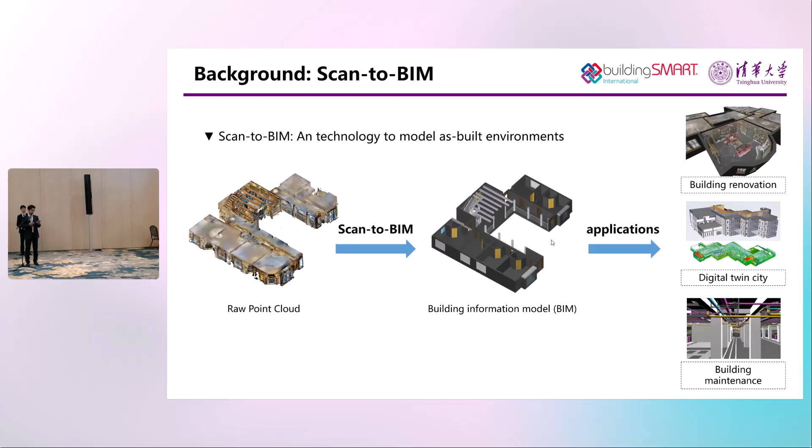Nowadays, scan-to-BIM is increasingly starting to embrace AI. But here, we still lack large-scale domain-specific datasets, multi-dimensional accurate benchmarks, and finally, we lack a standard workflow for AI-based methods. In short, AI is here, but scan-to-BIM is missing the foundation it needs.

These three issues create many obstacles for researchers in the field. For example, without a large-scale dataset, how can I train my AI-based algorithms effectively? Without a reliable benchmark, how can I evaluate whether my algorithm is good enough? And also, without a standard workflow, how can I even apply AI to my research? These unanswered questions show the urgent need for a new solution.

To answer this question, we present BIMNet with openBIM as foundation. Leveraging the open source, technically mature, and standardized features of openBIM, BIMNet aims at addressing these three challenges with three IFC-based designs. First, an IFC-based domain-specific dataset with real-world point cloud and also manually modeled IFC data.

Second, an IFC-based multi-dimensional benchmark covering both geometric and topological evaluation for scan-to-BIM. And third, an IFC-based scan-to-BIM workflow, integrating dataset, benchmark, and also multiple plug-in AI-based algorithms for scan-to-BIM. In short, BIMNet provides the missing foundation for AI-enhanced scan-to-BIM.

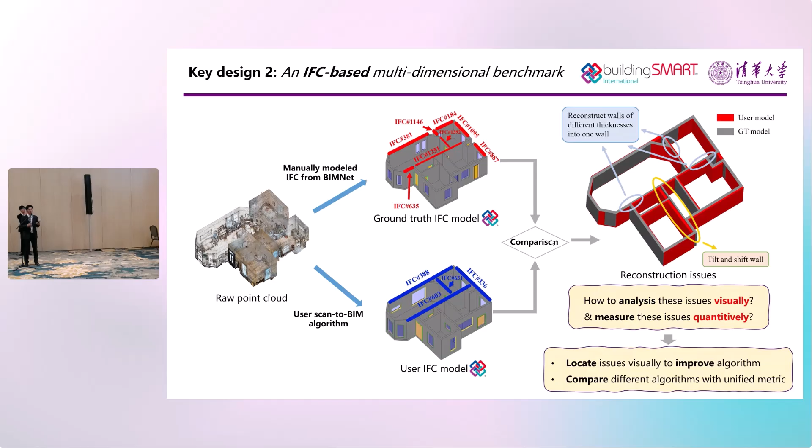Here is our design. For our benchmark, we first get the representation and placement information from IFC models. Then, we develop a geometric benchmark based on 3D intersection over union to evaluate the accuracy of reconstructed shapes.

We also develop a topological benchmark based on normalized graph edit distance, a technology to measure the difference between two graphs. This topological metric is aimed at evaluating the correctness of spatial relationships.

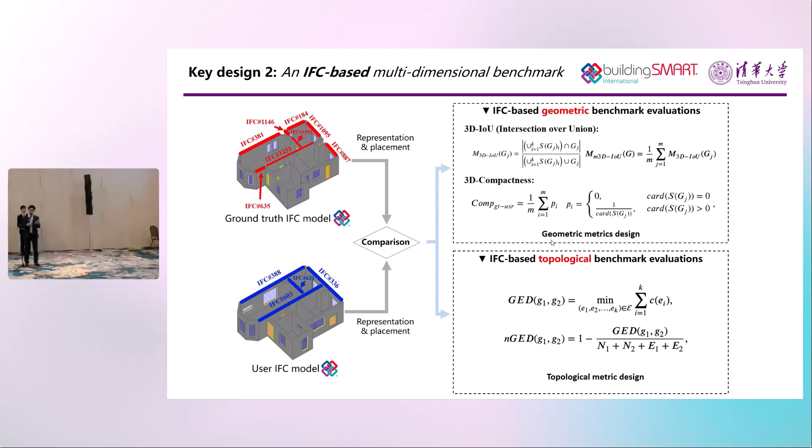These metric designs are implemented with IfcOpenShell, Python, and Open3D for measurement and visualization. Our geometric benchmark is sensitive to thickness, tilt, and shift of wall components, and our topological benchmark is able to find wrong space connectivity and wrong enclosed spaces.

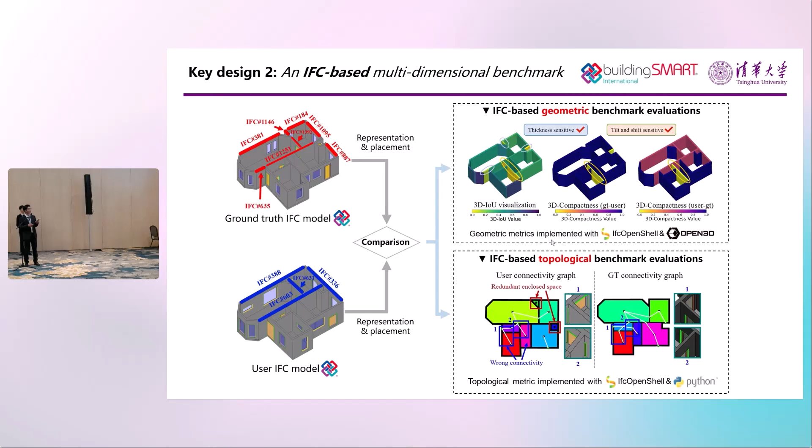Our third key design is an IFC-based scan-to-BIM workflow. First, we have our IFC-based dataset, which serves as the foundation for training plug-in AI-based algorithms. Our benchmark evaluates the performance of the algorithms.

Once the algorithm is trained and validated, it is ready to be deployed online. Our workflow finally takes real-world scans as input and outputs as-built BIMs for various applications.

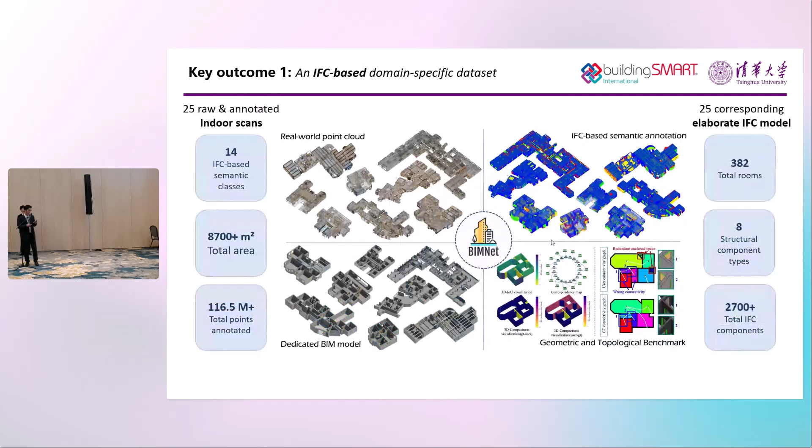Next, let's go through the 3 key outcomes corresponding to our 3 key designs. The first outcome is we publicly release BIMNet, an openBIM-based large-scale scan-to-BIM dataset, spanning more than 8,000 square meters and encompassing more than 300 rooms.

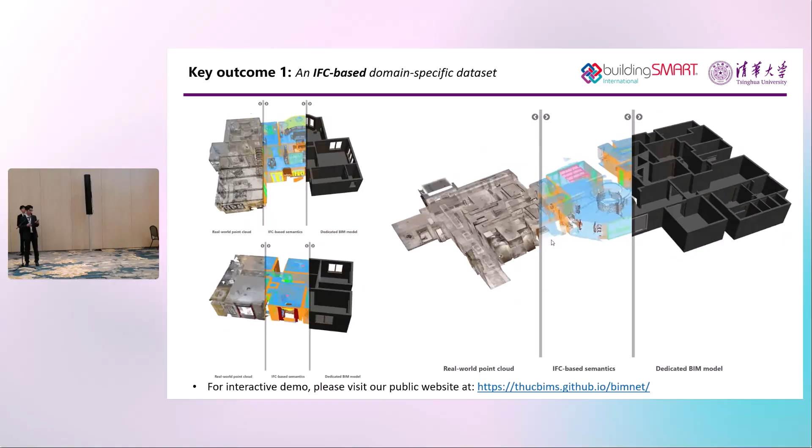Here are some interactive demos for our dataset. Each data example includes real-world point clouds, IFC-based semantic point cloud, and dedicated BIM models to support training and evaluation at all stages of AI-based scan-to-BIM.

The second outcome is we propose an IFC-based multi-dimensional benchmark. Through real-world and scale-up stress testing, it is proved that our geometric benchmark significantly increased the issue detection rate and evaluation efficiency. The proposed topological metric also fills the gap of the underexplored scan-to-BIM topological metric with IFC-based design.

Our third outcome is an IFC-based scan-to-BIM workflow. Today, many of our colleagues talk about combining AI and AEC through large language models. However, in our research, we want to offer a different perspective, connecting advances in computer vision with AEC, especially highlighting the importance of AI-based point cloud semantic segmentation in scan-to-BIM.

At the stage of semantic segmentation, we're able to train and validate up-to-date AI-based algorithms with BIMNet. While at the stage of component reconstruction, we can also analyze and evaluate scan-to-BIM algorithms with the BIMNet workflow.

We want to emphasize why openBIM is the key foundation of BIMNet. openBIM provides us with mature and widely adopted BIM standards, which are suitable for AI training. The open nature of openBIM has made it easy for us to access geometric and semantic data of IFC.

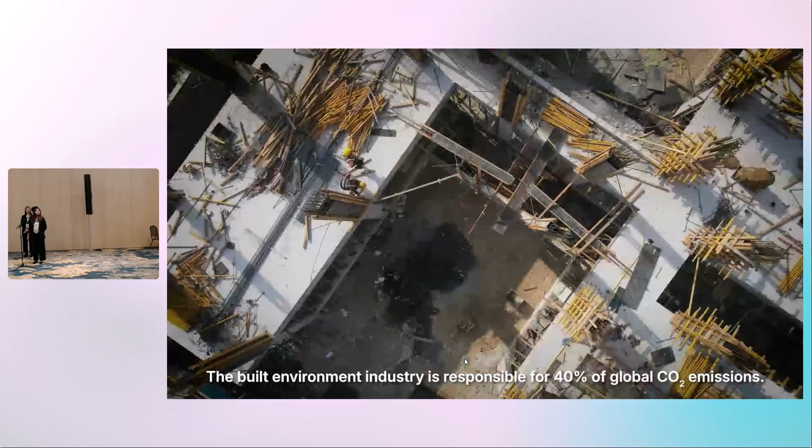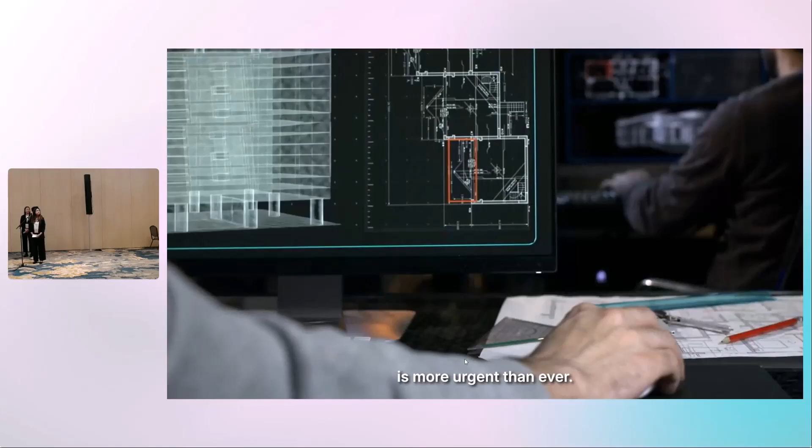Unlike operational carbon, embodied carbon is locked in once construction begins. That's why managing embodied carbon at the design stage is more urgent than ever. But today, carbon checks are manual, tedious, and slow. And that's why sustainability is often an afterthought, until now.

I'm CarbonSmart, the smart way to reduce embodied carbon quickly, accurately, and sustainably. Let me show you how I work.

Let's create your first project. Upload your IFC file. I'll scan and identify all elements.

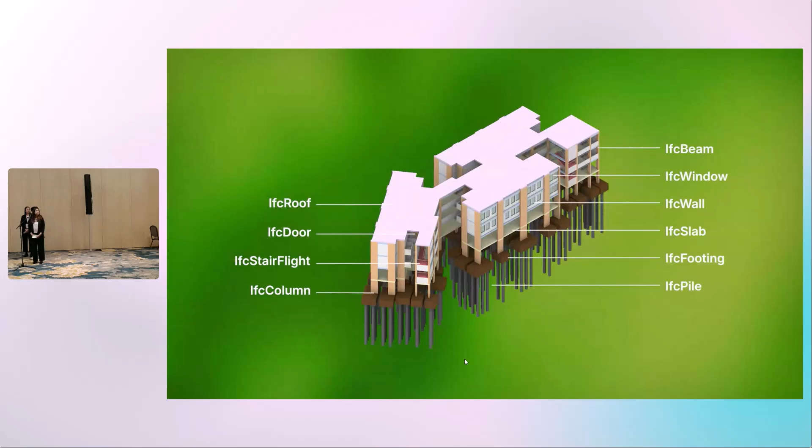I'll check your materials against my database. Don't worry, I'll catch any mistakes. Fix what you can, I'll take care of anything left behind.

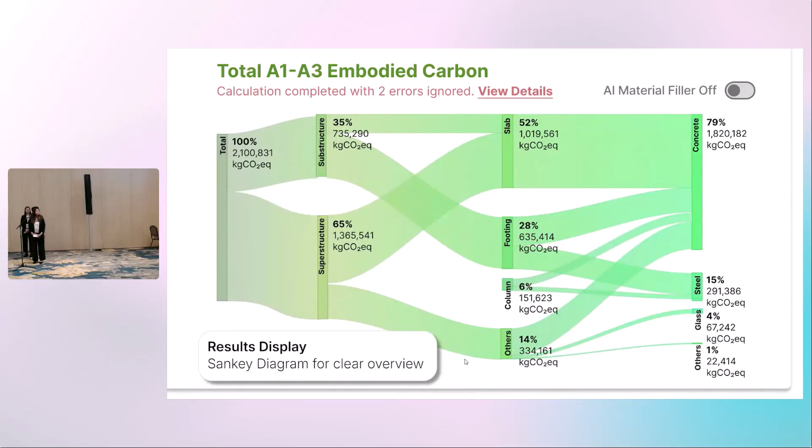All set? Sit tight, I'm calculating the values. That's it, here are your results. Not sure about everything? I've got it covered.

Got a new iteration? Drop it in. Let's see what's changed. All done? I've got your results ready for export. Perfect for your documentation or reports.

Our vision for CarbonSmart is making embodied carbon visible, early, and easily actionable through open data standards, thereby empowering the AEC industry for smarter decision-making as well as a sustainable future.

So how did we come about with our project in the first place? We found that embodied carbon is often overlooked and not considered early. With the overall 40% contribution by the AEC industry towards global carbon emissions, it is important for us to reduce carbon emissions to save our environment as well as its downstream impacts. Traditionally, operational carbon has been at the forefront of industry efforts.

However, we believe that there needs to be a shift to focus on embodied carbon, as embodied carbon is set in stone and there's a shorter time frame for embodied carbon to be tackled.

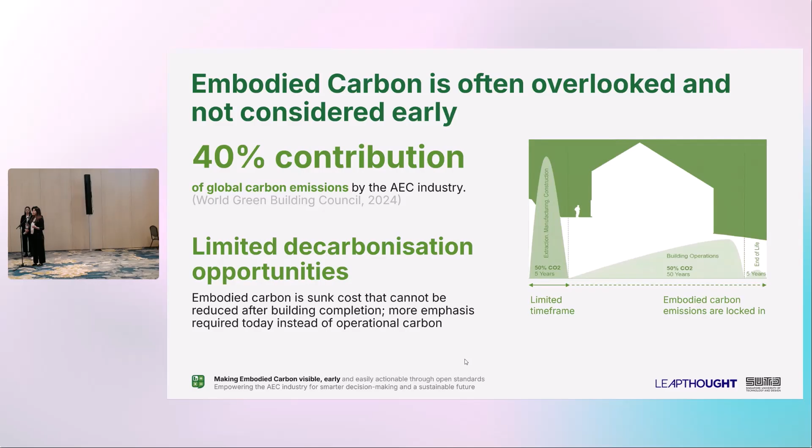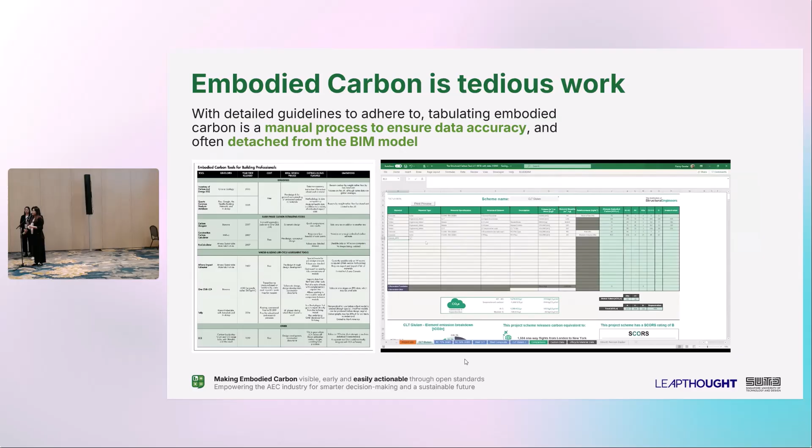From our interviews and surveys with different companies in the AEC industry in Singapore, we found that the embodied carbon documentation process is currently a very manual and tedious one. This means that a lot of manual data processing is needed from the different stakeholders in order to arrive at the final embodied carbon calculation, which often takes up 2 weeks.

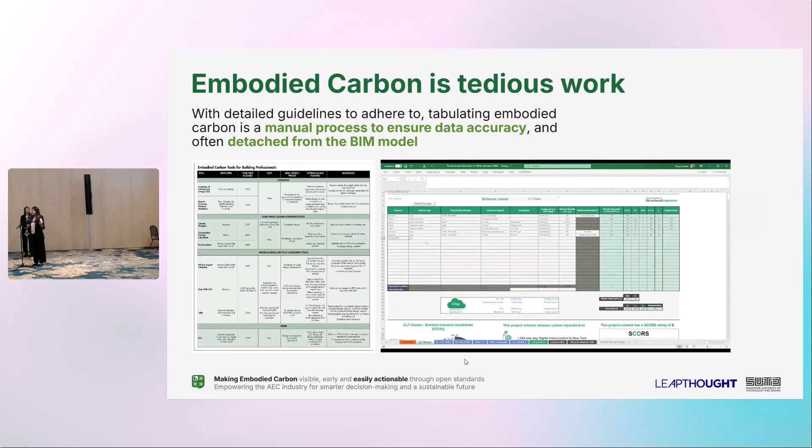This brings us to our problem statement. How can we streamline processes between the AEC stakeholders during the pre-construction design phase to effectively reduce embodied carbon of buildings?

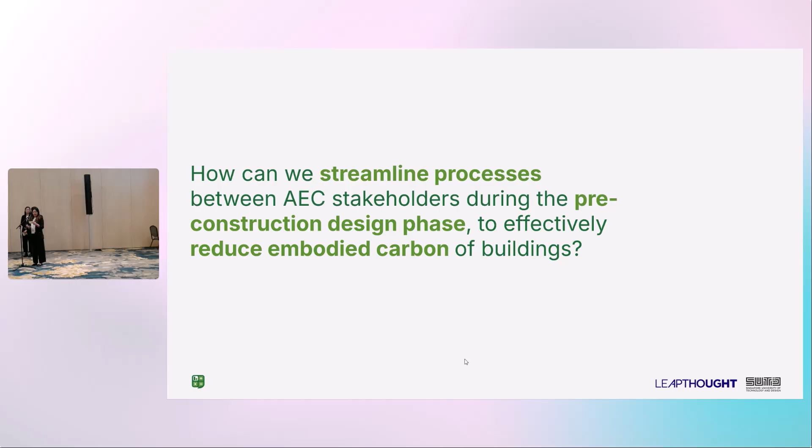A bit more context about our project is that we're based in Singapore, which is one of the first few countries to have mandatory BIM submissions along with openBIM data standards. And that helps our project align with the national standards and goals, such as using openBIM during integrated planning and design, as well as looking towards a sustainable urban system towards decarbonization efforts.

Using this baseline of Singapore, we envision that CarbonSmart can be sort of a pilot testing in Singapore before scaling up globally, as well as since Singapore has already used openBIM in their national compliance checks, embodied carbon can be part of that natural workflow as well. We also envision that CarbonSmart can help set a global blueprint to do decarbonization through openBIM.

And all of this was kept in mind to prospectively integrate into LeapThought's platform of Fulcrum HQ with the launch of CORENET X, which is Singapore's mandatory openBIM regulatory submission platform.

So from our design process, we understood that multiple AEC stakeholders use different authoring tools and different file formats. And when embodied carbon calculations are involved, this often takes a lot of processing because of the different file formats and data requirements needed. And after long weeks of processing this data, it ends up in a very technically detailed report for documentation, but it's often detached from the BIM model as a lot of processing needs to be done.

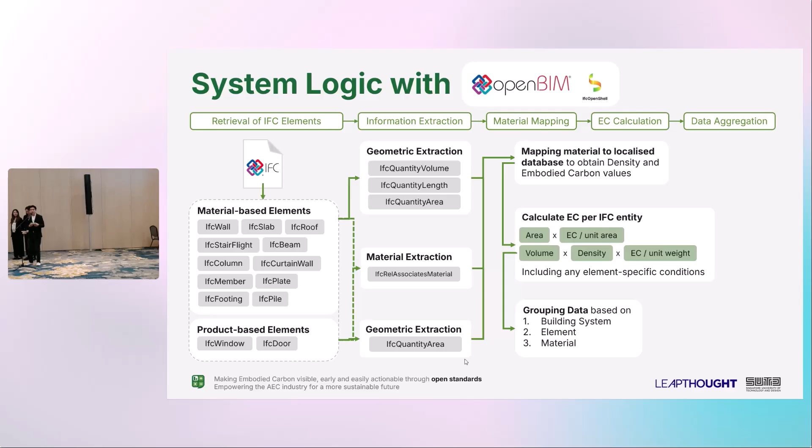openBIM as well as IFC has also allowed for consistent material schema traversal and classification into specific IFC entities, making the workflow to calculate embodied carbon very easy as well as consistent. Our core product produces and manages to calculate trusted embodied carbon output with error handling.

But the AI component that we have makes it smarter. Using a sentence transformer model, if your model has undefined or mistyped materials, it will learn from past information to select the best fit for the material. Despite our system working well without AI, this AI material filler will result in fewer defaults, less rework, as well as more accurate EC calculations.

And with that, we see CarbonSmart being sustainable for both business and environments. One key impact of CarbonSmart will be to increase opportunities for reduced carbon intervention at early stages of design. This eventually saves manpower costs for design changes along the way.

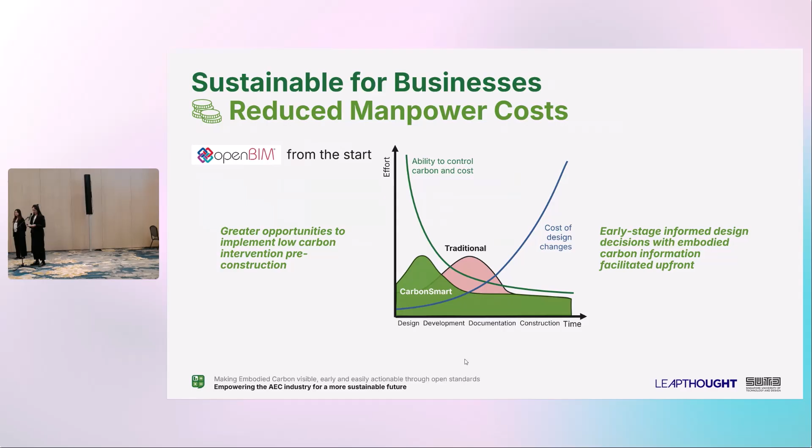Additionally, we help keep the history of file uploads, assisting users in design iterations and mitigating potential errors in every process. This results in a lower risk of communication breakdown with greater transparency.

More importantly, we help reduce the time taken from two weeks worth of work to five minutes, giving you quick and fast, accurate calculations with visual feedback and dynamic results.

In the long run, what CarbonSmart aims to do is enable a greater understanding of embodied carbon with design decisions made in the AEC industry. We help benchmark against green standards and compliances, giving quick and accurate visual changes with material substitutions, eventually revolutionizing design decisions to be more sustainable.

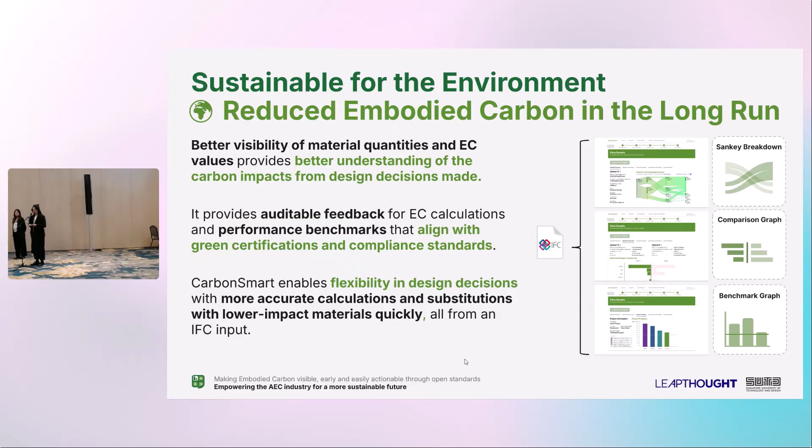Thus, CarbonSmart's mission, to reiterate, is to make embodied carbon visible, early, and actionable through open standards, as well as to empower the AEC industry for smart and sustainable decision-making in the future.

Once again, CarbonSmart would not have been possible without the foundation that LeapThought has laid out for us.

To give some context on this foundation, CarbonSmart was developed not as a standalone tool, but as part of a much larger vision for Singapore's digital built environment. This vision is powered by LeapThought's platform, Fulcrum HQ, which forms the backbone of Singapore's next-generation regulatory system under CORENET X.

Fulcrum HQ is a cutting-edge cloud-first platform transforming how enterprise knowledge, productivity, and regulatory data are managed. It underpins the CORENET X collaboration platform, central to Singapore's Industry Transformation Map. By shifting regulatory submissions from isolated documents to coordinated model-based submissions, CORENET X leverages openBIM for seamless collaboration across disciplines and agencies.

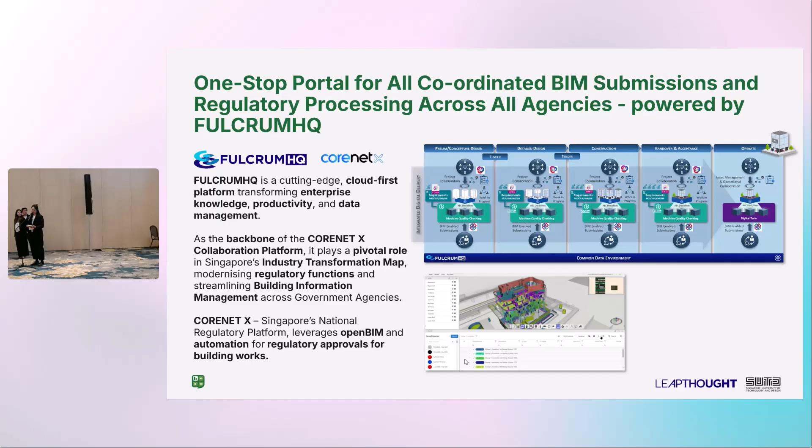This is how CarbonSmart can eventually plug in as part of a sustainability compliance check, meaning an embodied carbon national submission framework. A key feature of Fulcrum HQ is its automated model checker, which aligns with Singapore's vision of regulatory efficiency through openBIM and automation.

Just as Fulcrum HQ applies advanced algorithms to validate design rules, CarbonSmart applies its own calculation rules to assess embodied carbon within IFC models. Both share the same foundation, using openBIM to ensure accuracy, repeatability, and industry-wide applicability.

These are just examples of the type of automated regulatory checks already being handled through Fulcrum HQ. The value here is that once data is embedded into the BIM model, it can be checked automatically, consistently, and transparently. And this is exactly the philosophy that CarbonSmart builds upon.

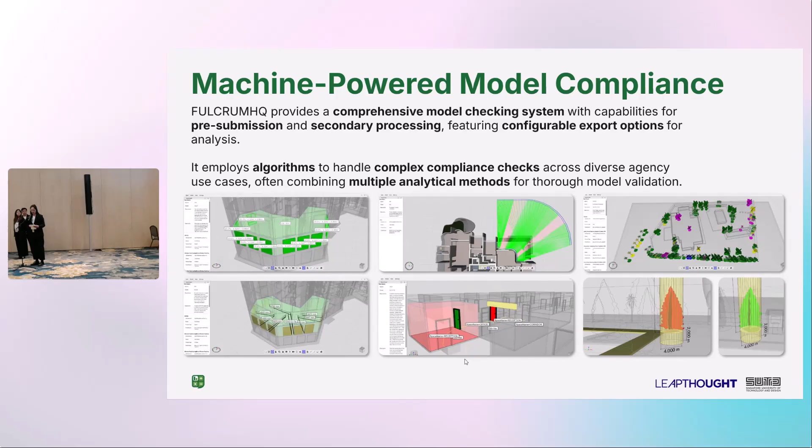When embodied carbon is embedded into the same openBIM model, it can also be automatically checked, benchmarked, and improved. In this way, CarbonSmart is not just an academic prototype, but a potential extension of the same ecosystem that is already transforming how Singapore builds.

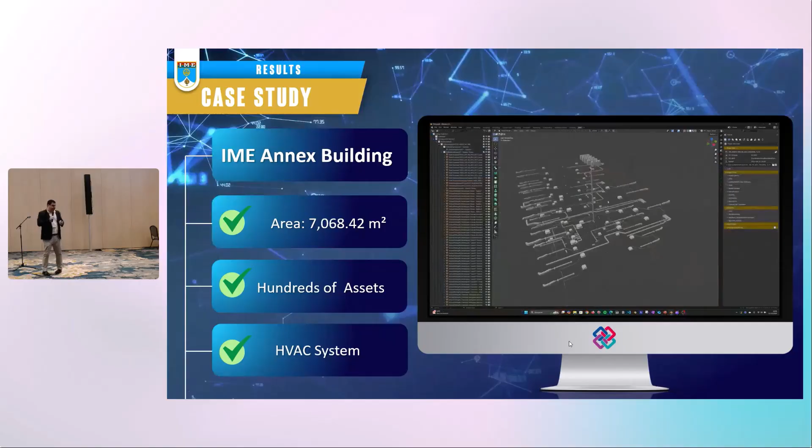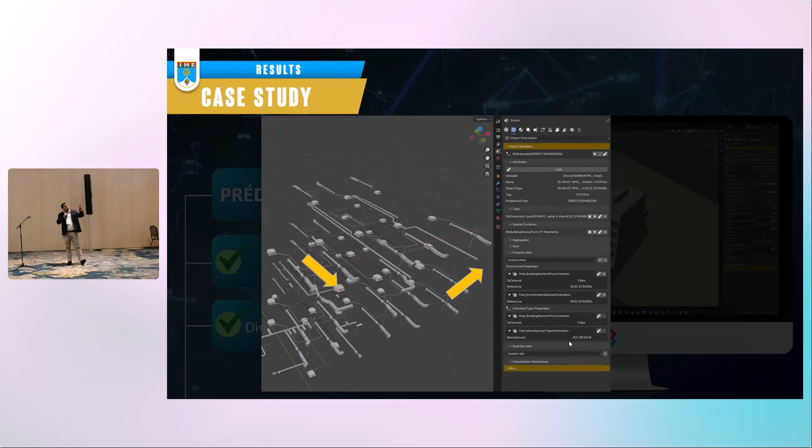In our case study, I used a student dormitory, the IME Annex building, which has hundreds of assets, but we will focus on an HVAC system, more specifically on the air conditioner system that we are seeing. When we start to analyze the model in this side menu, we can see that we don't have the necessary information to start the operational phase. So we started the process.

Here we are informing the IFC class, the destination URL, and the user token. After that, we select the option Bulk Create. After that, all the registers of this specific class were created in the web platform, as it was in the IFC file. So here we don't have the necessary information because it's just a copy of the IFC file.

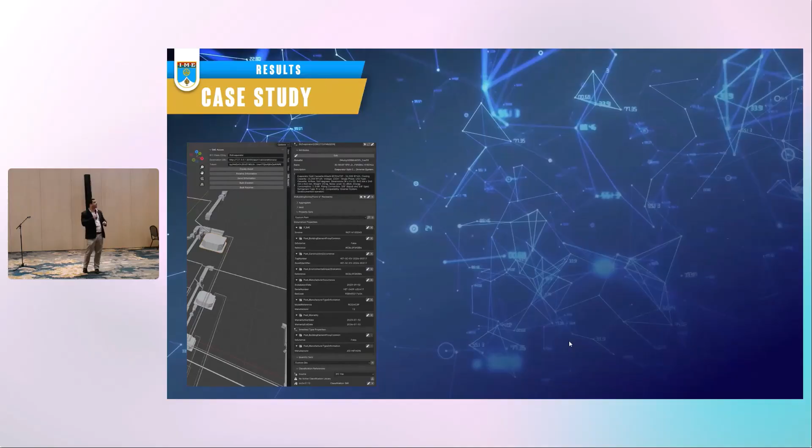So we start editing the information during the building process. And once all this process is over, we can transfer this information back to the IFC model. So now we have the same information that we had in the web platform, and now our IFC file is an information compendium as ISO 19650 stands.

Here there's a video showing everything worked together. So we are starting by informing the IFC class that we will work with.

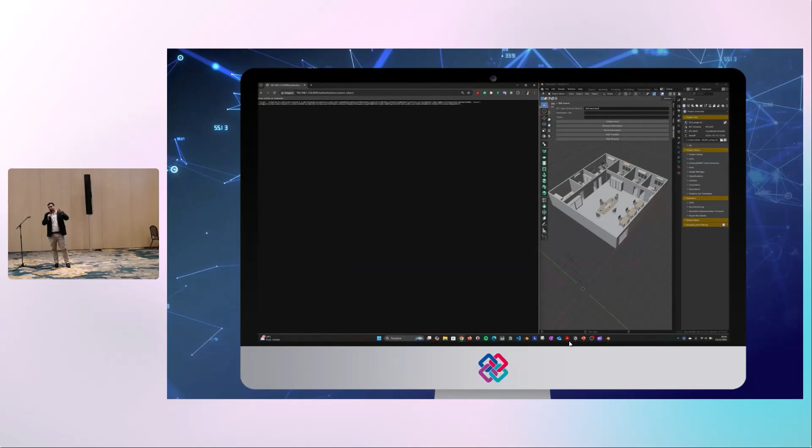And after that, we will use the web platform to generate our user personal token. So the user will have to inform username and password, and it will generate their personal token. And here we use this token to insert in the add-on to start to perform the operations.

So here I'm pasting the token, and after that I will inform the URL address. Now we are ready to start using the add-on.

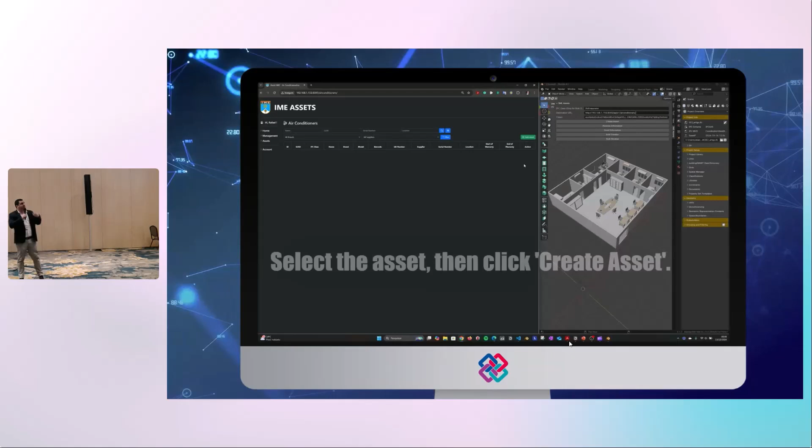So let's create our first asset. I just need to select an asset or object in my model and click on Create Asset, and the information will be registered in the web platform.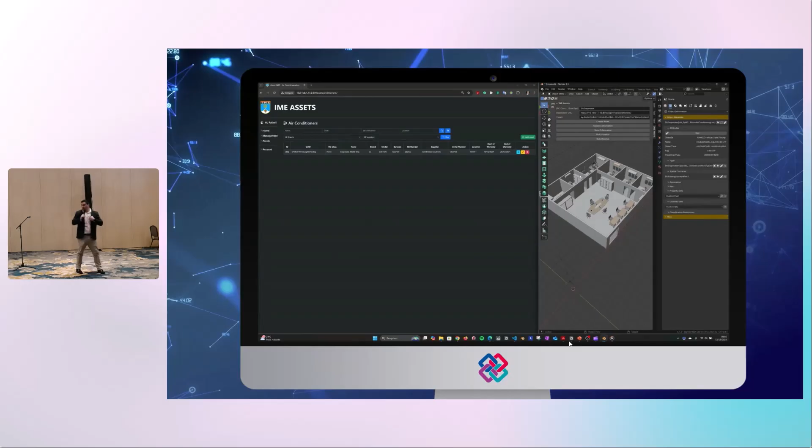Now in this situation, the information is ready, verified, and audited in the web platform, and I want to transfer it back to my IFC file. So here we can see the information is done.

So I will select the object and click on Receive Information, and I will send it to my model. We can see in the side menu, I don't have the information. When I refresh, now I have the information in the correct IFC class.

I can do the same in the opposite direction. Now I want to update the information directly on Blender. So I will change the information from 10,000 BTUs to 50,000 BTUs. I edit it in Blender, and after that, send information, and I will update my database.

And for the last one, the bulk creation operation. I just need to inform my IFC class and click Create Asset, and with it, all the information will be registered in the web platform with just one click.

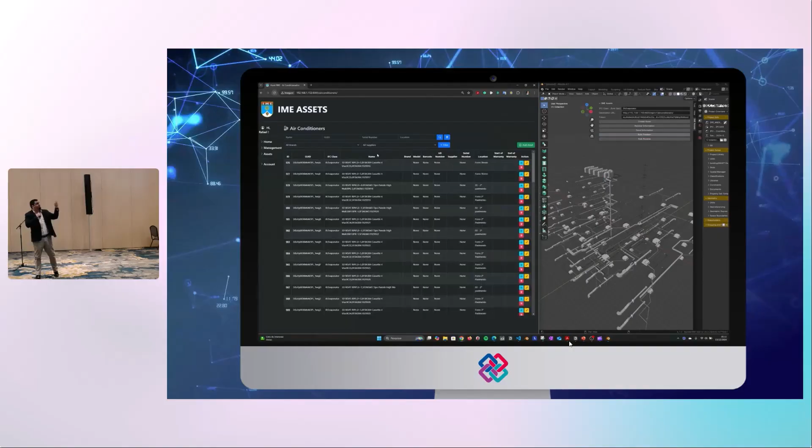As conclusion, component number 1 was able to provide an initial guide to help owners draft their asset information requirements. The web platform was able to organize and centralize information in a friendly environment for auditing. The API ensured a bidirectional flow of information between the database and the add-on. And the add-on correctly allocates the information in the IFC schema, using the BIM model as a centralized data repository.

And lastly, the entire workflow relied exclusively on open tools and open BIM solutions to prepare the model for the operational phase.

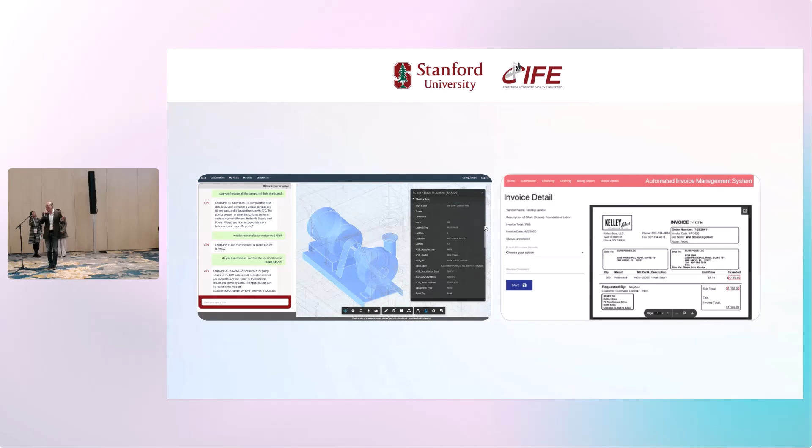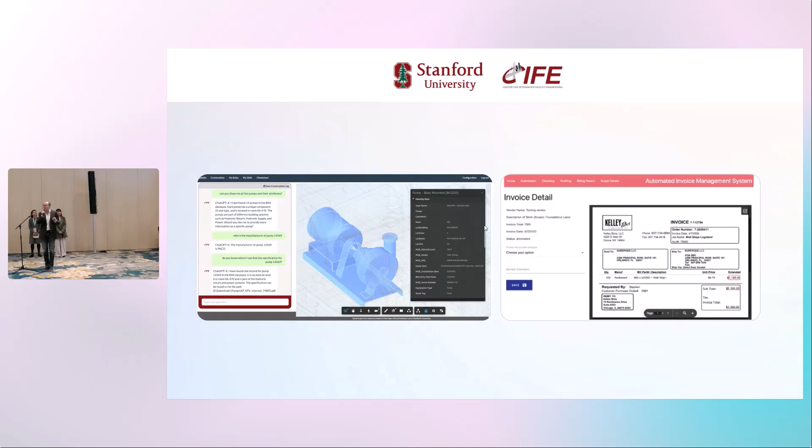And so in professional research, we also need to build on the best out there. We work with some of the tallest buildings in the world. We work with some of the best research. I'm serving as an adjunct professor at Stanford University, 25 years there now. Some of our PhD research work has been looking into native BIM with AI, has been looking into vision language model or computer vision with traditional invoices. Now the opportunity is that how can we bring those body of work research into openBIM?

So on the left-hand side, if we look into early stage, want to understand embodied carbon, our focus is how we can use retrieval augmented generation to let it be tuned, fed with local standards, local building code, local purchase order, delivery order. And of course, as you know, there's so many different forms of AI out there. So a research and development team looks at what are the performance metrics, how do we go with which AI? Even different versions of the same AI can give you very different results.

And then later stage, in terms of operational carbon, we still work globally with utility bills that may be on paper, that may be in different forms. How can we use AI to be a friend and turn those semi-digital information into the openBIM workflow? And similarly, how does a vision language model within AI get augmented to make it work?

So in the first use case about reducing embodied carbon, our team has been working on IFC research, in my case, since 25 years ago. We've been looking into BSDD IDS research for 5 years, working with version 0.6 of IDS at that time at city scale. So we build on those bodies of knowledge in this research. But the key focus, as I mentioned, is how we can feed the AI with local practice. American standard, Singaporean standards, they should be different in those different adaptations, and that's what the retrieval augmented generation is about.

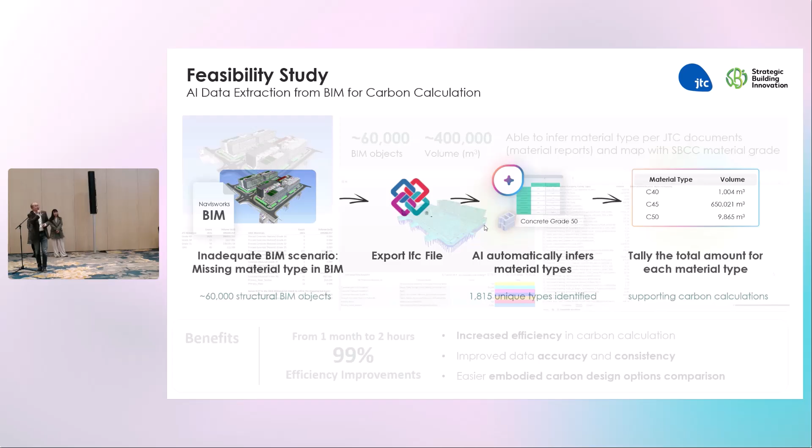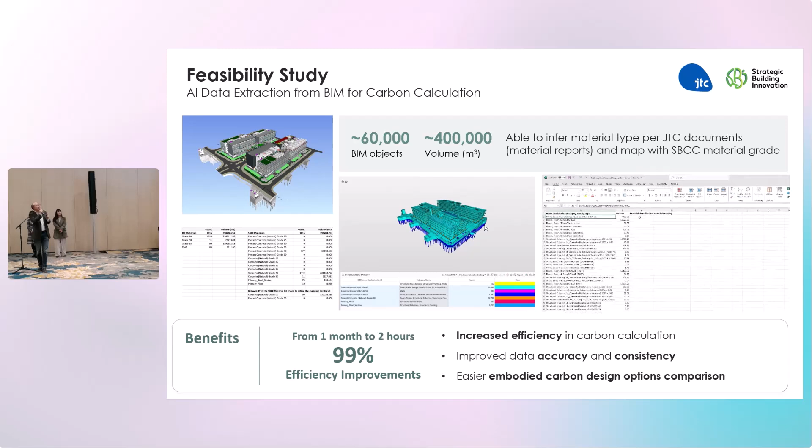And so validation, it's important that it's valid with examples out there. Working with the Singapore government, JTC, they gave us 4 BIMs, and we were able to bring it to the openBIM format. Our AI with the retrieval augmented generation was able to infer 1,815 material types that map to the Singapore Green Building calculation. Again, that's different from how you may do it in Europe and in the US. In the end, our openBIM visualization can visualize based on embodied carbon. The original BIM has missing, has error, has no information about those. It's also about how the government agency was able to tell us that it took them almost a month to complete that. Now we can reduce it down to hours. Even on the first try. Imagine we can do it 5 times, 10 times later on.

But at the same time, the variance to the traditional approach—and by the way, how good is the traditional approach, anybody's guess—but we are within 94% of their traditional carbon calculation.

Now let's move the validation to one of the tallest buildings in the world, this skyscraper project we have been working with. It has openBIM, but once again there was no carbon calculation in mind, let alone finding the engineers and sustainability managers from 20 years ago.

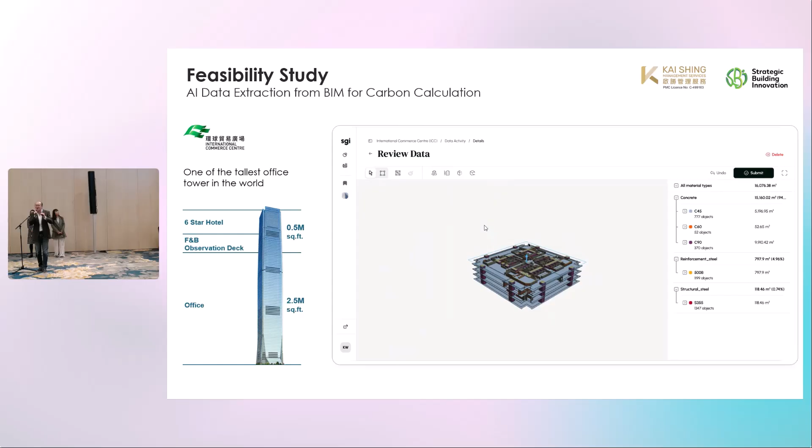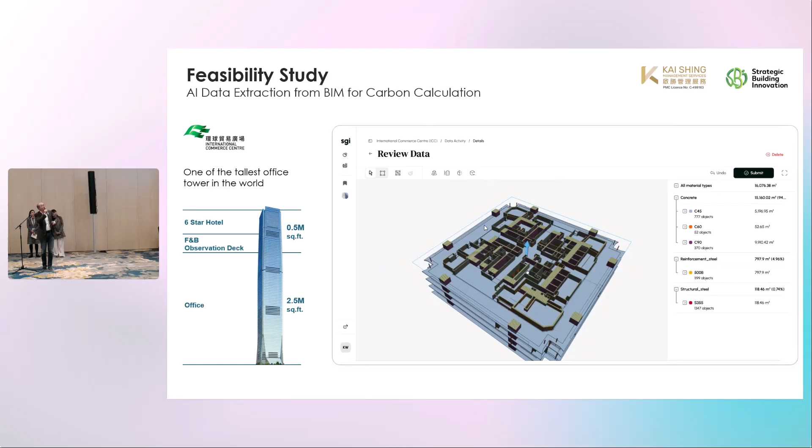So we were able to then change the RAG with the local practice and local standard from Hong Kong and let the recommendation and the inference take place. The response is that you can see on an openBIM platform how we can read some of this information based on embodied carbon. And then we also want to move beyond embodied carbon to look into the operational stage.

So Kayla, tell us more about that. Thank you, Calvin. So beyond the embodied carbon calculation, we also tackle the operational carbon. We use visual language models to read the utility bills, and then we use openBIM to visualize the data so that the performance insights will be more clear and actionable.

This is our workflow. First, the user uploads an IFC file with the space objects. Our team is also exploring using bSDD and IDS to validate the data so that the results will be more ready for analysis in the future.

Second, the user uploads utility bills, and our augmented visual language model will be able to extract data like energy consumption, billing period, and cost from different types of utility bills, even from images. We also implemented pre- and post-processing to ensure the outcome would be more consistent and accurate.

Eventually we map the results onto the IFC space so that we know and calculate the energy use intensity, and the team can easily identify the areas where we can cut down carbon emission and energy usage.

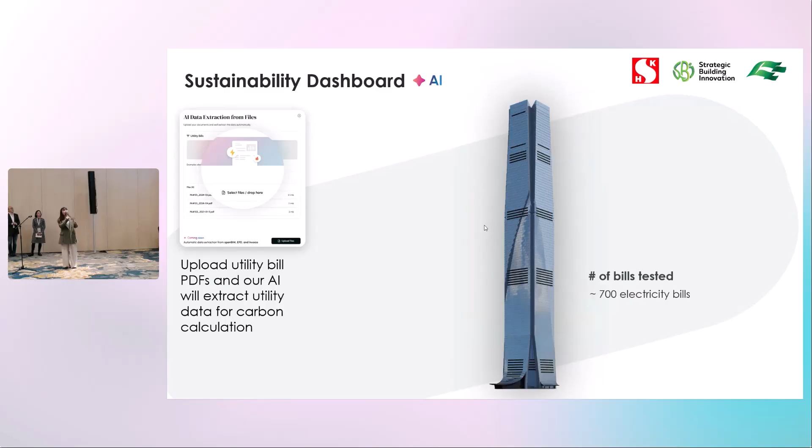We also implemented the workflow in the building just mentioned by Calvin, ICC, and there are around 700 energy bills uploaded to this platform. Among all, the average processing time is about 20 seconds per bill.

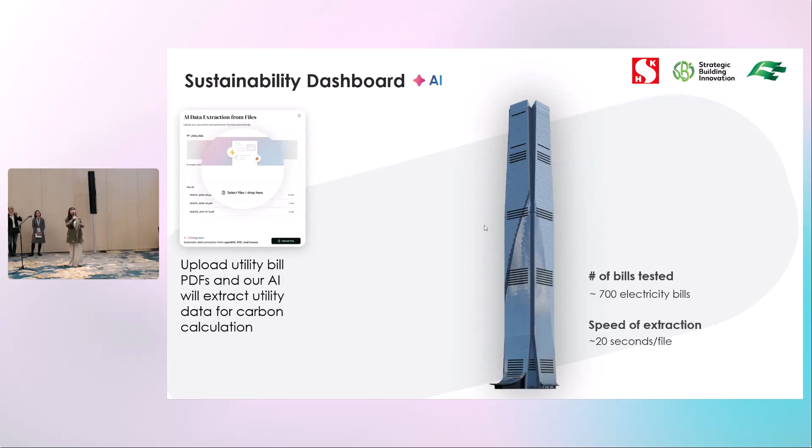There's a 94% time reduction compared with the traditional workflow. More than that, now the team can easily see an all-in-one integrated dashboard of their performance from energy and water, etc. Let's see Mr. Jeff Ng, the Senior Manager of ICC Property Management Team, about the outcome.

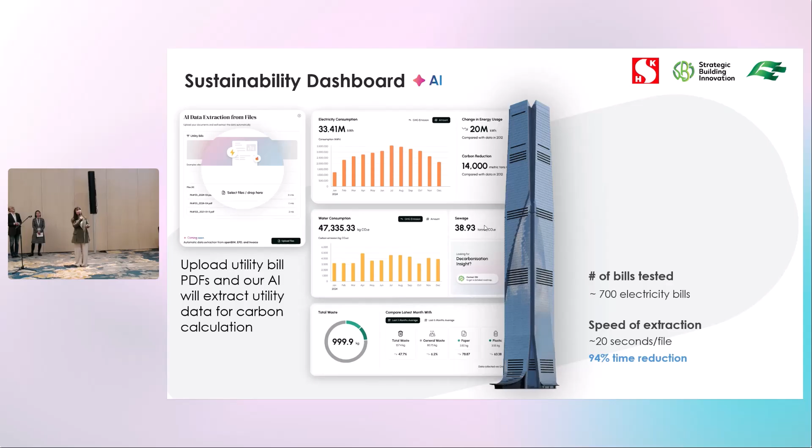Uses this AI platform to extract data from 700 utility bills, cutting process time by 94%, and analyzing greenhouse gas with multiple factors, helping us achieve our sustainability goals.

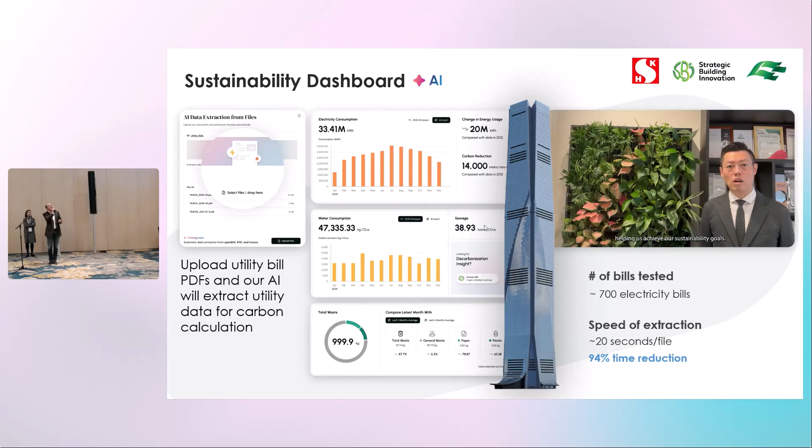So yes, really getting third-party validation on an actual live project is an important part of our validation. In this case, we have worked with 300 IFC files. We have worked on the operational stage. They have a CDE following ISO 19650 with information management.

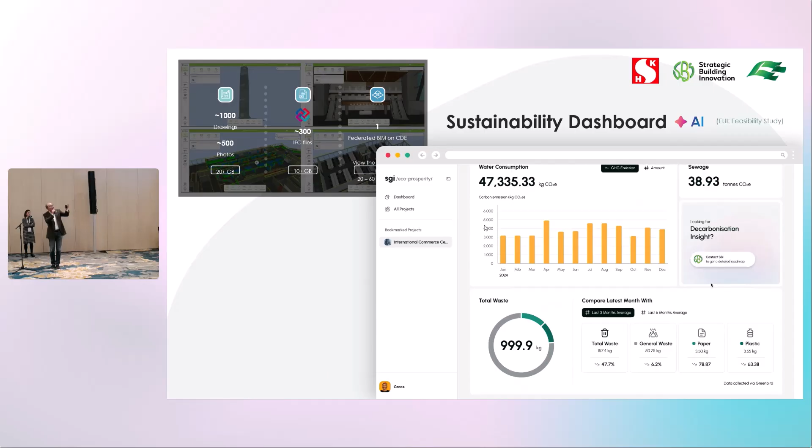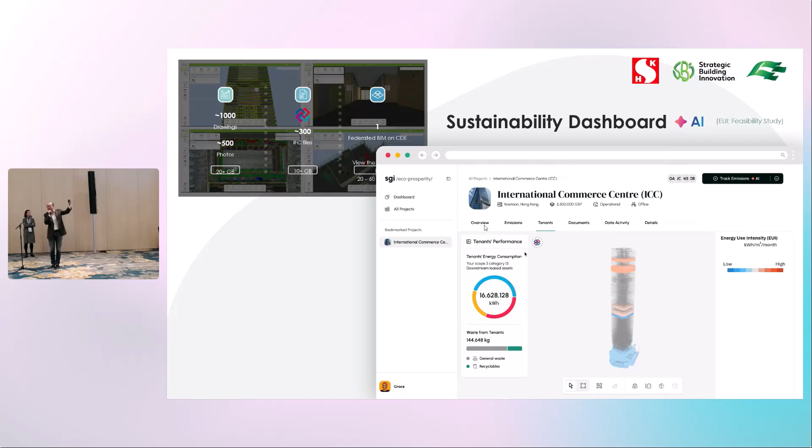Yet the key addition here is to leverage vision language models and be able to turn utility bills—traditional paper ones, scanned ones, photo ones—into carbon data within seconds, and we can do batches of them. Then, in the end, we superimpose this utility bill data back into openBIM so that we can see the energy use intensity based on operational carbon in an IFC openBIM platform.

And of course, we should do it on our very own building. This is our own headquarters building in California. We are proud to have received LEED Platinum when it was completed a few years ago. And guess what? Exactly like those global examples, we turned 230 utility bills through our AI and then brought it back to the openBIM workflow.

In short, we can handle that in 15 seconds per file, and we can do it in batch. With this kind of research, we were able to propose it and got good support from agencies, government agencies.

Not only here in Europe—I was over at Molio and Delft TNO a few days ago—but with California Highway, Caltrans not only saw the promise, they actually teamed up with us, California Highway, to go after federal highway grants. And federal highway also gave us a good report.

And that also applied not only on the horizontal side, but with the GSA Public Building Service, first using openBIM 20 years ago.

They also saw that the promise of AI for this automation for Green Proving Ground was huge. But more importantly, this is only a step in this direction. Our research journey is still ongoing. Yes, we are looking at AI for operational carbon, AI for embodied carbon, AI for lifecycle management, and how different parts of large language models, different versions of it, vision language models, how you do post and pre-processing, can be part of the open BIM workflow. But more importantly, working with academia and industry leaders, it's about improving processing time, reducing cost, improving audit trail confidence, and making sure that the open BIM workflow works.

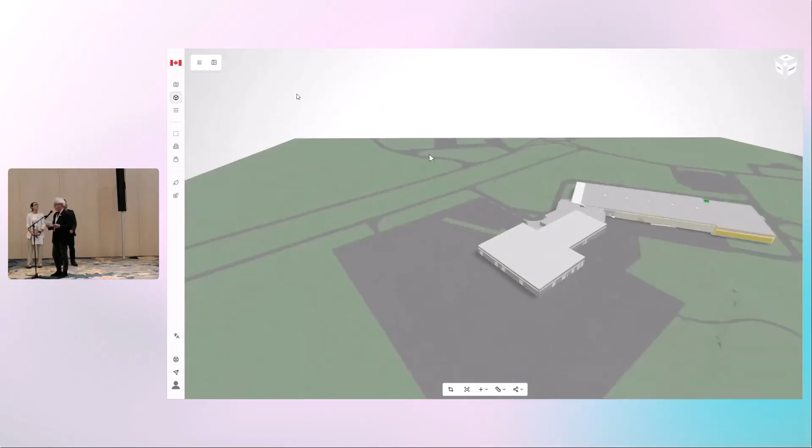Now, Canada faces a crisis of infrastructure information. For example, our partner, the Department of National Defense, manages approximately 21,000 assets located across approximately 100 million hectares. 100 million hectares. Canada's a big place. Spanning every province and territory. And these assets are both geographically and typologically diverse, from military bases in the Arctic to heritage buildings in the center of cities. This massive portfolio is managed through fragmented information systems, siloed data practices, and incompatible proprietary technologies. And this isn't just a Canadian problem, it's a global challenge that openBIM principles are uniquely positioned to solve.

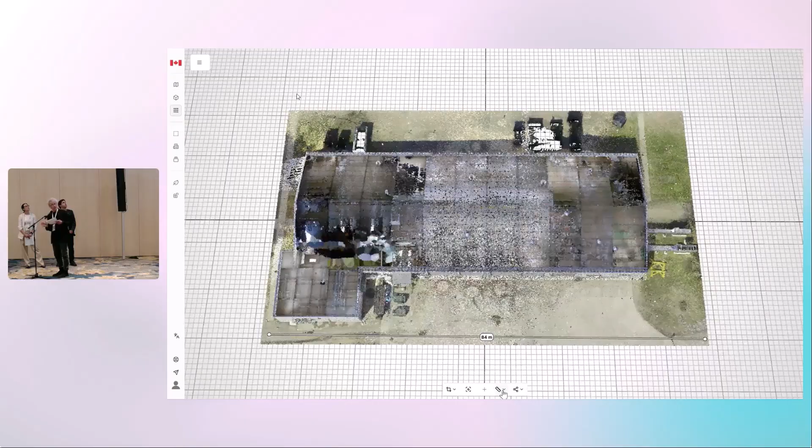So our response to our research question is fundamentally grounded in openBIM. And rather than offering another proprietary solution, we developed an open source, browser-based digital twin platform that places openBIM at its very core. Our platform architecture exemplifies openBIM's promise of interoperability. Built entirely on open source technologies, it federates diverse data sources into a unified browser-based environment. I'm going to turn it over to Laura.

So our project adopted a research methodology grounded in co-creation, stakeholder engagement, open standards implementation, and iterative prototyping. So there's two main components to our research.

First, we conducted a comprehensive review of open and international standards for BIM and GIS. Next, we defined specific use cases spanning the full asset lifecycle, from design and construction through operations and digital twin applications. We then identified the information requirements to ensure that the platform supports DND's current operational needs while enabling future ISO 19650 compliance. This foundational work culminated in the development of EIR templates for DND.

In parallel, we defined the functional and technical requirements of the platform itself, and then through iterative prototyping, we used real-world DND assets to test the integration of varied data sets into the platform.

Hello. So now let me walk you through our platform open source architecture. Starting from the top, at the user layer, the platform utilizes Next.js as its full-stack React framework. The front end uses Tailwind CSS and ShadCN components for responsive, accessible design across devices and languages.

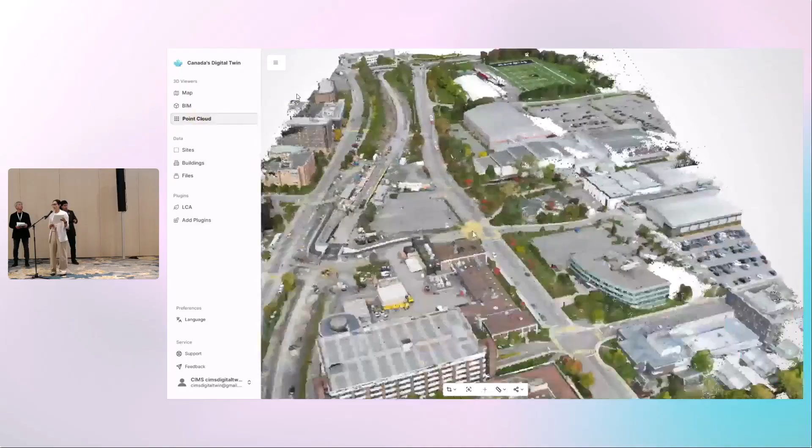Once logged in, you'll notice our left-hand toolbar provides intuitive access to our federated data environment. We have our viewers - the map viewer, the BIM viewer, and the point cloud viewer - and then a database for sites, buildings, and files. This organization supports both micro-level building management and macro-level portfolio analytics.

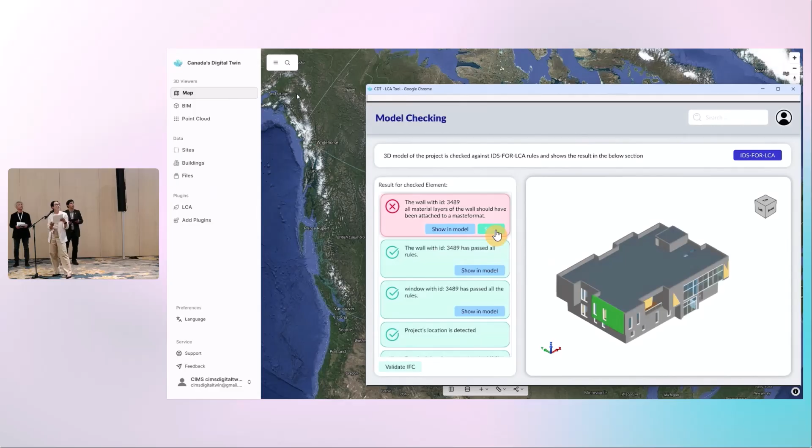The toolbar also houses integrated tools, including NRC's openBIM LCA plugin, which uses IFC-based workflows for carbon benchmarking and automated model verification throughout a building's lifecycle. This integration demonstrates how our digital twin platform can create a unified, open standards-based ecosystem of analysis tools.

All right, let's begin by exploring our site database. Here we can access comprehensive data for any site, including all associated buildings and files.

Moving to our buildings database, you can see our advanced search and filtering capabilities. Users can search by year built, building type, and numerous other properties using standardized terminology.

Drilling down to the individual buildings reveals comprehensive data tabs. We use the buildingSMART data dictionary to develop our properties, and our next development phase will research connecting these directly to the IFC models. Notice how we've integrated diverse file types - here you have IFC, point clouds, documents, and multimedia, all accessible through the same interface.

Now let me demonstrate what we consider to be our most significant technical challenge, which is the seamless integration of BIM and GIS. This addresses one of the central challenges we faced, which is bridging fundamentally different paradigms in a web environment. Watch as I add IFC models to our campus.

Here we have 45 models totaling 4 gigabytes of data. Each model loads within sub 2-second performance, even for files exceeding 500 megabytes.

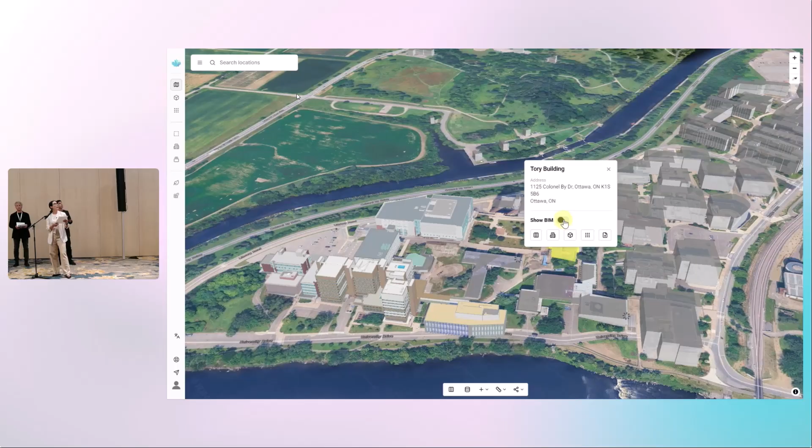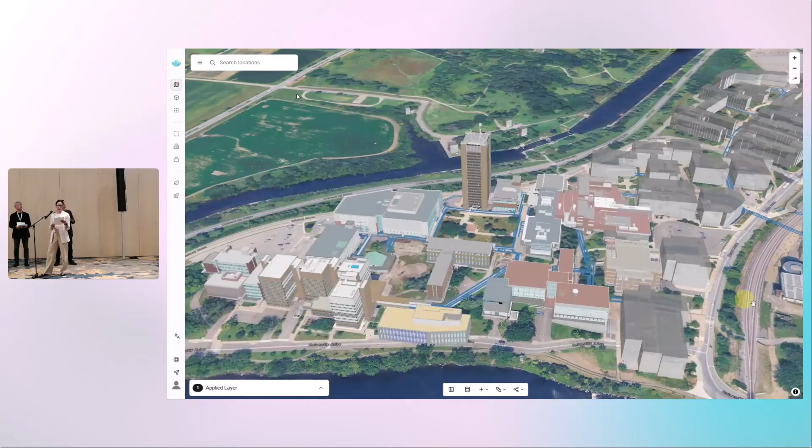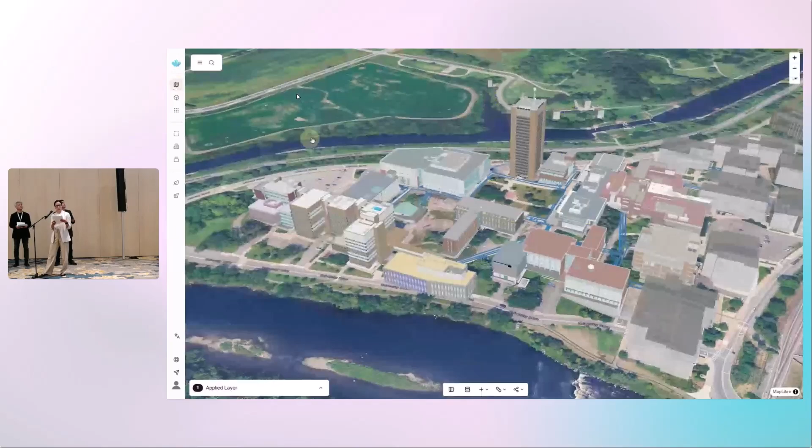Next, we'll add GIS infrastructure data showing campus tunnels, demonstrating how building scale and infrastructure scale information coexist within our integrated environment. This cross-scale integration required solving complex coordinate transformation challenges by extracting information from the IFC projected CRS entities and using the proj4 JavaScript library for accurate coordinate conversions.

Users can also add comments and models directly to the map to share with other users, enhancing collaboration.

Now, zooming out to Ottawa, I'm going to reveal our open data federation capabilities. The platform automatically retrieves open government data from different municipal, provincial, and federal sources. Here, we're adding neighborhood boundaries, Canadian airports, transit networks, and tax data. This integration happens through standardized APIs with no additional data manipulation required.

We currently federate over 25 sources and counting. This makes previously inaccessible data sets easy to layer and visualize alongside your building and GIS information. The dynamic visualization controls allow for enhanced data analysis, transforming fragmented government data into actionable intelligence, supporting data-driven decision-making for all users.

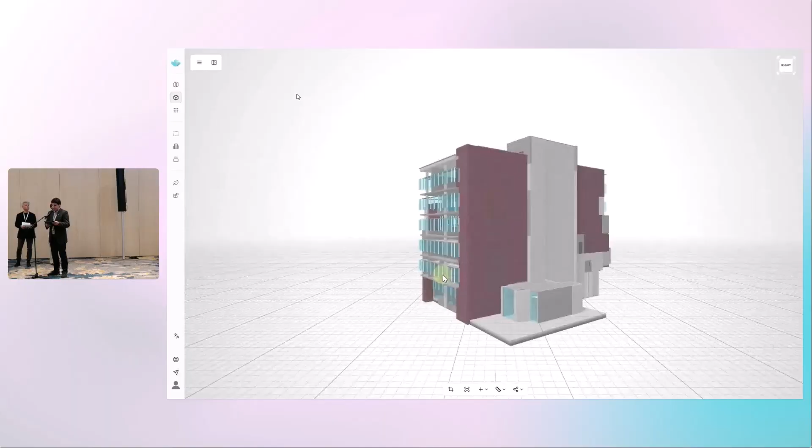Okay, now returning to the Carleton campus, let me now demonstrate the heart of our platform: openBIM standards in action. Opening this IFC model in our viewer showcases native browser-based IFC processing. The complete IFC structure is preserved exactly as authored, maintaining the entire IFC hierarchy.

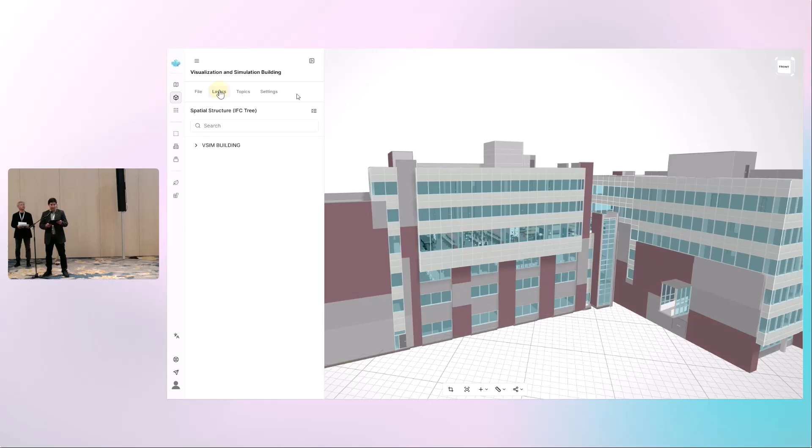One of our major challenges was preserving complete semantic richness - property sets, quantity sets, material, and classification systems - while maintaining performance. This isn't simplified geometry. This is the full IFC schema accessible in any standard browser.

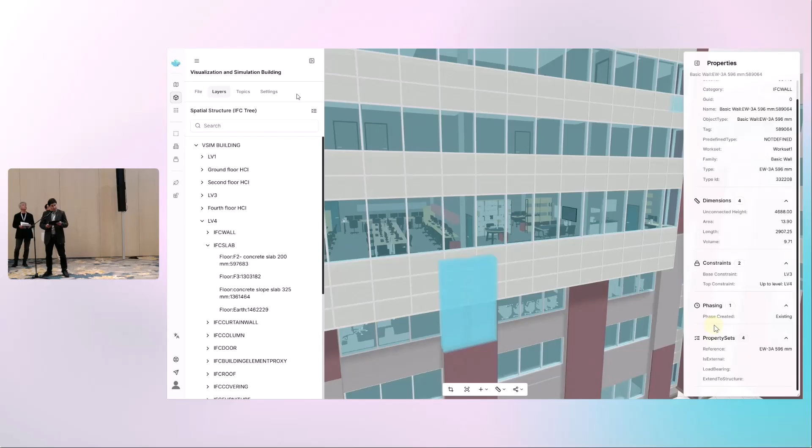When I click on any building element, the Properties panel instantly displays all IFC attributes, entity properties, measurements, material assignment, constraints, phasing information, custom property sets defined during authoring, and more. Our platform supports multiple file formats.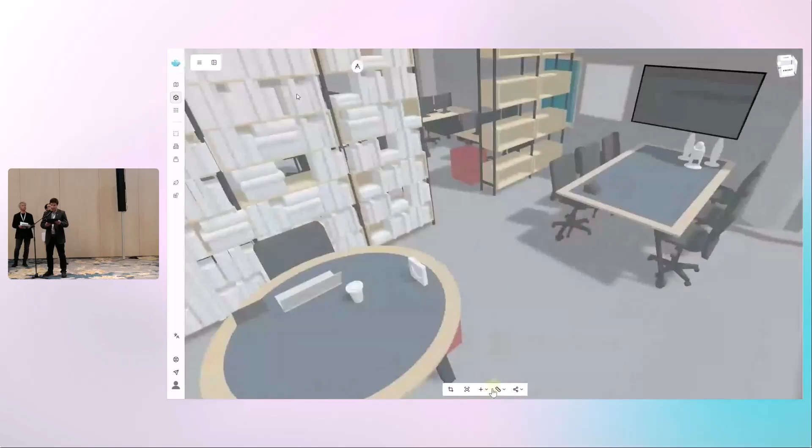Here I am adding a DXF CAD file, providing additional reference information. We have created a three-dimensional editing tool for the user to scale, rotate, and place the file in relation to the IFC. The user can also upload 3D models from various file formats such as GLTF, FBX, OBJ, among others, and point clouds. This multi-format capability ensures compatibility with diverse workflows while maintaining openBIM as the central data foundation.

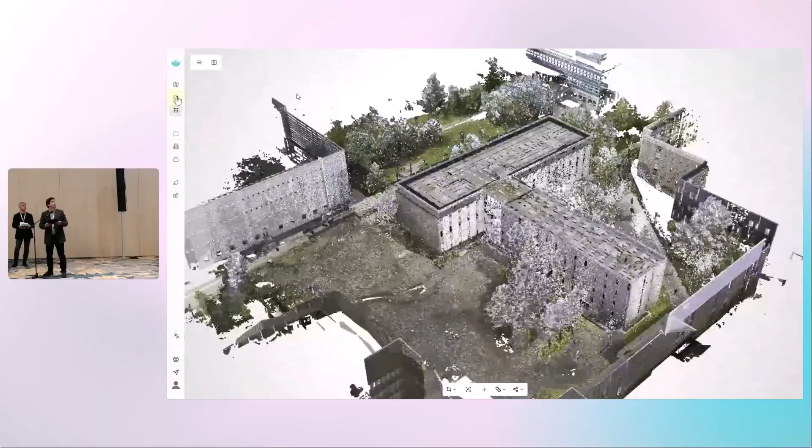The integrated analysis tools work directly on IFC geometry. Our sectioning tool allows dynamic model exploration, while our measurement tool provides precise dimension and analysis.

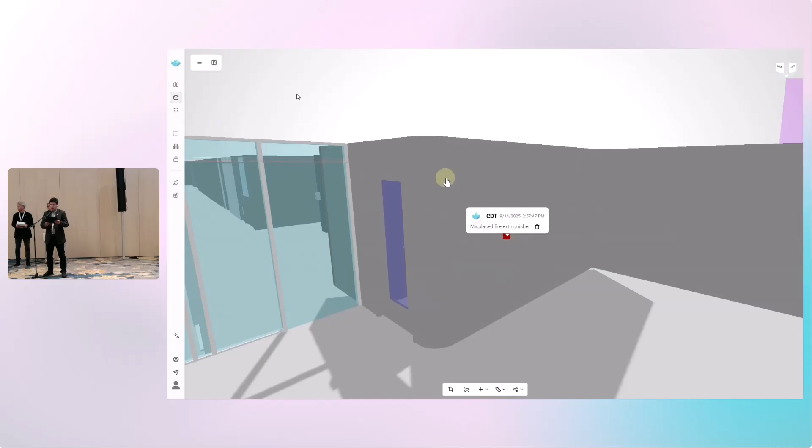The user can add comments to enhance collaboration within our BIM viewer, but the platform also provides a robust implementation of the BIM Collaboration Format, or BCF, a cornerstone of open BIM workflows.

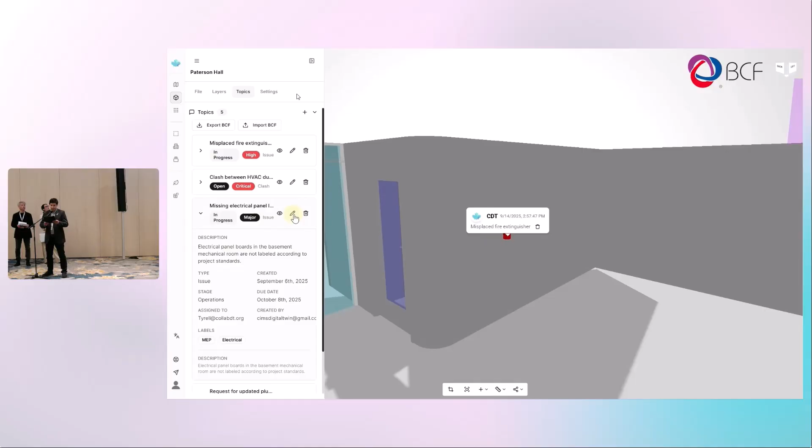By creating or importing BCF files, the platform enables structured, model-based collaboration. Each BCF topic is connected to a precise viewpoint within the IFC, moving beyond free text comments to deliver context-rich communication. Exploring these topics reveals the complete BCF lifecycle: identification, responsible party assignment, proposed resolution, and clearly defined status progression. This vendor-neutral standard ensures that collaboration data remains interoperable and accessible across all authoring tools and platforms.

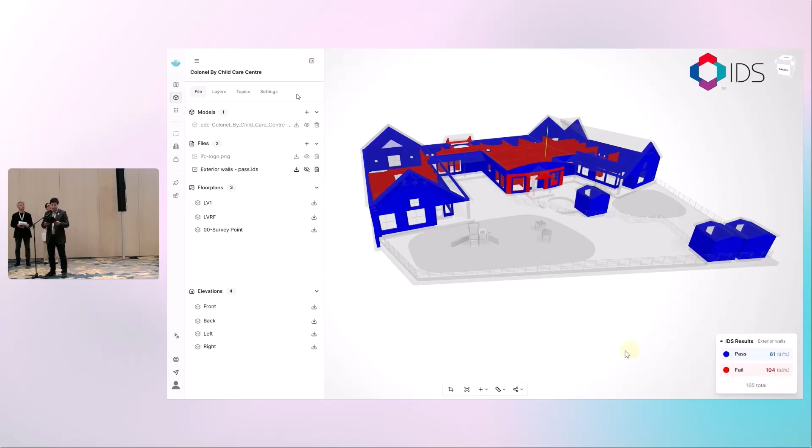The platform also supports Information Delivery Specification, or IDS integration, another fundamental openBIM standard. By importing IDS files, users can check IFC models against explicit machine-readable exchange requirements that define what information must be delivered and in what form. The viewer graphically highlights which model elements conform or do not conform to the specified requirements, making compliance checking both transparent and actionable during coordination.

Throughout the project, we've overcome significant technical challenges that we believe will advance the entire openBIM ecosystem. A few examples from BIM-GIS integration include, to reiterate, solving coordinate system integration between IFC and GIS data paradigms, and achieving enterprise-scale performance for browser-based IFC processing while preserving complete semantic richness across web platforms.

And imagining BCF implementation at an urban scale.

Our roadmap for development includes the integration of artificial intelligence and large language model technologies to enhance data analysis, real-time operational sensor data streams, and global search and query capabilities across data sets.

The beta release is scheduled for this fall, 2025, and will make the core technology of our platform accessible to the broader community. By open sourcing our research, we are ensuring that other organizations, hopefully some of you, can build upon our work and advance openBIM adoption globally.

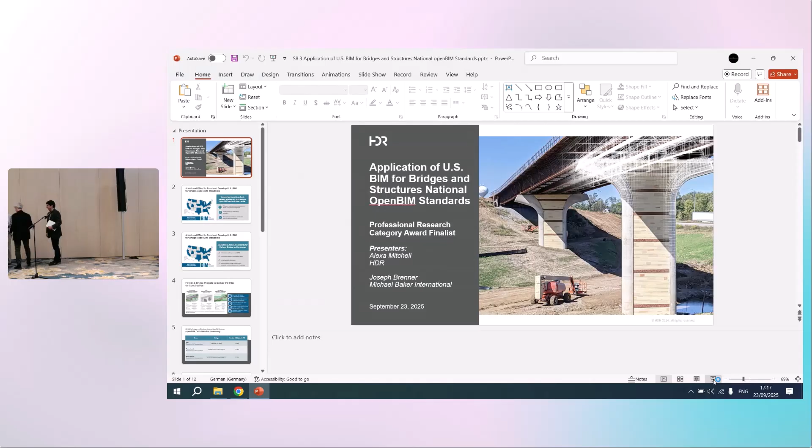Hello everybody, my name is Alexa Mitchell, and I am with HDR. We are an AEC firm in the United States, in Canada, and Australia. And I am representing the team. Can you start the slides?

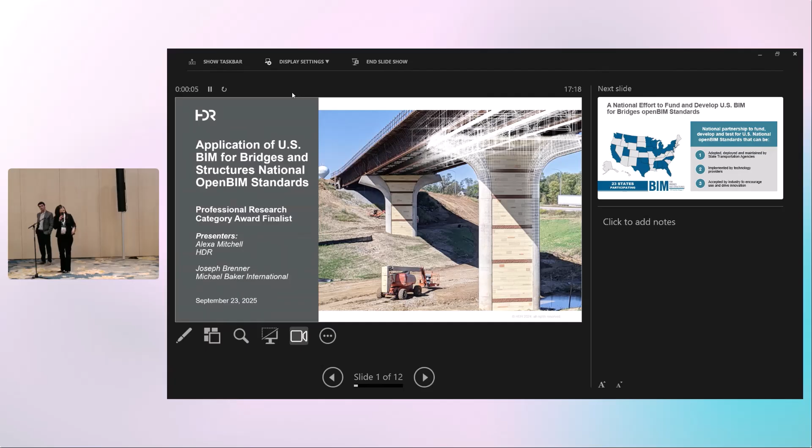I am representing the team that developed and is working on the application of these national BIM for bridges and structures openBIM standards, which is a national standard. I am also the principal investigator for the project. With me I have Joe Brenner, the lead bridge engineer on one of the projects where we are testing the standards today. I'm going to talk about the project at large, and he's going to give you some of the details on how the standards are being applied to the projects.

So let's start with the beginning. What is the project? This is an effort that brings over 20 state DOTs and the Federal Highway Administration together to put resources toward funding the development and application of these standards at the national level, so that every state has the opportunity to deliver projects in a similar way.

We want these standards to be adopted, deployed, and maintained by the state transportation agencies, implemented by all the technology providers that we do business with today, and accepted by the industry, so that we can encourage use and drive innovation. Because today, the way we do business in the US is that contractually, design teams are asked to deliver projects using proprietary software, and we do not have the choice to choose what software we use. So this is a big deal.

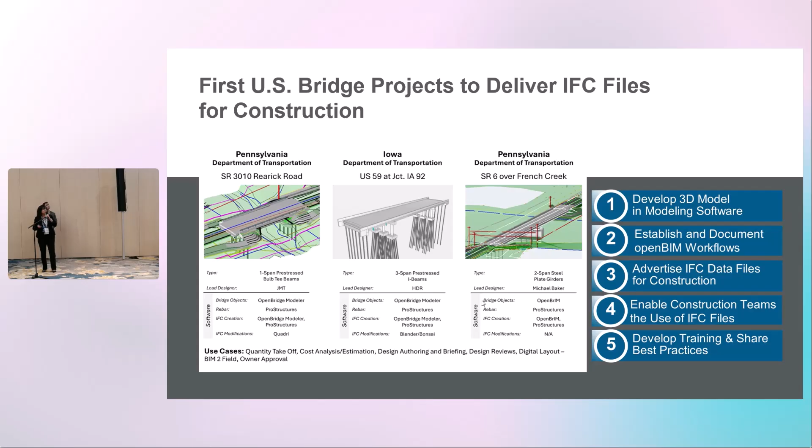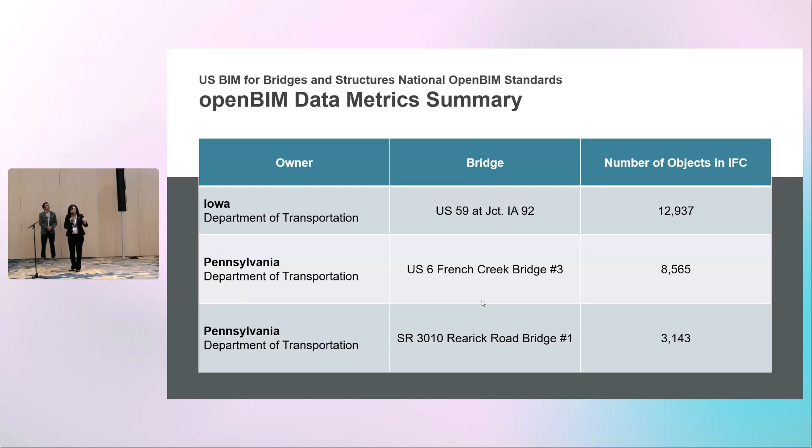So what this slide shows is some of the metrics that we were able to capture through the projects. We prepared 3 different projects, 3 different approaches, but this demonstrates that each team was able to produce thousands of objects in an IFC file, and multiple IFC files.

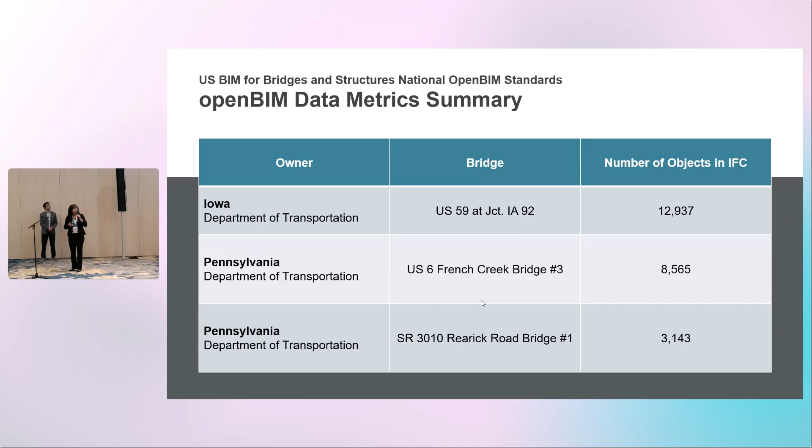The scope of these projects is very similar, but the teams are very different, with different knowledge of BIM, different knowledge of openBIM, working together collaboratively across state lines.

The research project, the standards that we developed, provided a very high level overview of the digital workflow that we had in mind for these standards. Number one, starting with, okay, you choose the software of your choice to develop and author your model. Then you use the software to add the information requirements, to append the information.

And I'd like to note that sometimes this requires special configuration of your software. It doesn't come out of the box. You're gonna have to do some work. The next step is to modify them as needed, because if they come out of the software as element proxies, that's not gonna be helpful.

So we went ahead and modified so that we could create a file that would eventually pass the validation service. And so we are confident that these files are of good quality. And then we took the IFC files that were validated and ran them against the IDS to verify compliance with information requirements, ultimately delivering a quality file for the construction team to use.

And I'm gonna pass it on to Joe, who's gonna give you more details.